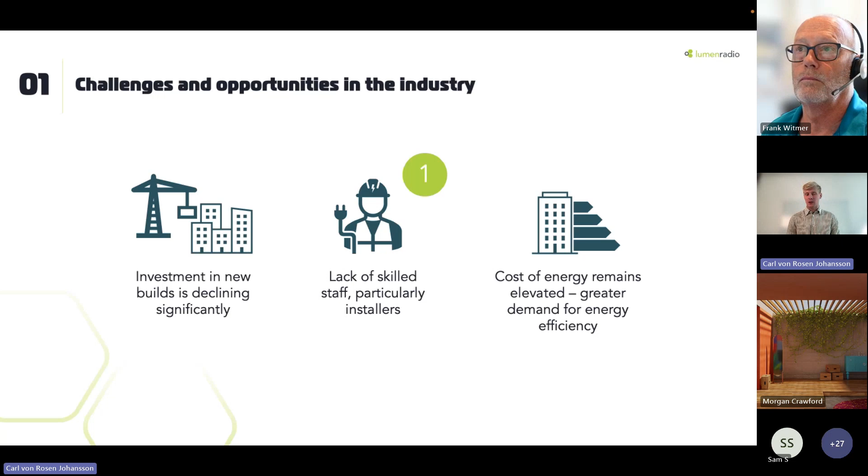And I think we have what we believe is a solution for that. It's not how you get more people, but the people you have can do more jobs more effectively. And we have some examples of that.

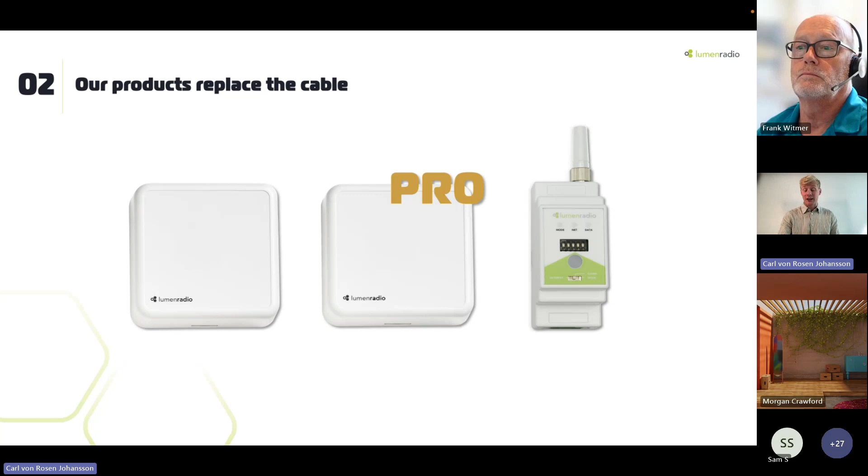But just to be clear, as Frank said, our products, Broudy carries them, Broudy has stock on them, so you can always buy them there. Super convenient. It's called wireless BACnet. It replaces the BACnet MSTP cable. It's what we call the wall mount Pro, and the DIN rail. And soon you will also have DIN rail Pro. That is the same product as the wall mount Pro, but in the DIN rail form factor. So that's coming as well. But basically, in short, Pro versus a normal one is that you can have more MSTP devices trunked to your wireless device. But we will talk more about that later.

So how can wireless help you? Me and Frank have 4 examples with us today, and I will talk first about one, and then Frank will mention one case, and then I will talk about 2 cases where I think it's the bread and butter cases, so to say, where basically the scale and the full potential of the wireless system comes into place. But to get it started, this use case, Ian knows a lot about it. He's been in the building.

Basically, it's a massive old building in New York, just on the Hudson, and it's 2.3 million square feet to cover. And the base installation, which Ian helped them do, I think it's 2 years ago now, it was 50 BACnet units to cover all 18 floors.

The purpose of that was to collect LoRa temp sensors that go into a LoRa gateway. That LoRa gateway spoke BACnet MSTP. They use those temp sensors to control the environment in the building, so it's not going to a cloud only for monitoring, it was actually used in a control loop. That's why the LoRa gateway had BACnet MSTP back to the Jace and Niagara.

But the BACnet MSTP trunk was not able to drill through the 3 feet thick concrete wall, so they needed another wireless solution to bring that back in. And that's where they started with our devices.

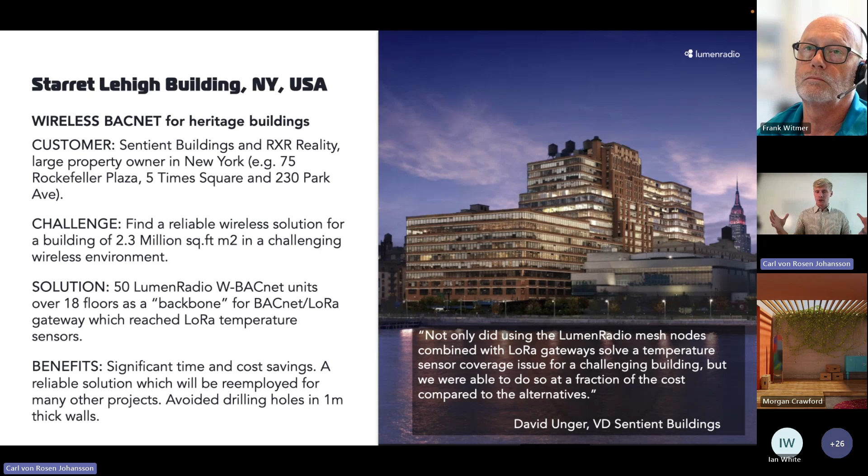Of course, it's not recommended to have that big of an MSTP trunk on one trunk if you're doing full active control loop. But in this case, the requirement was once per hour for the temp sensors. So with lower requirements, you can have bigger networks. With fast requirements, you should have a smaller network. But we can come into that.

But Frank, I want to give the floor to you because this is a case you've been working with. Yeah, this one here is up in North Jersey, and it was a job that KF Mechanical had done, where they had rooftop air handling units that they needed to bring back into their system.

And the challenge was that they had the MSTP controllers sitting up in their metal enclosures on the roof, and needed a way to be able to connect them all rather than spending a lot of money to run conduit and get it hardwired in, where they were able to go in and use the W-BACnet device. They put in a gateway in the center of the roof in the mechanical space with the Jace, and then they had the W-BACnet devices at each unit.

Initially they had them installed inside the unit, and there were some issues with the wireless signal coming and going, which makes sense, it's sitting in a metal cabinet. They remote mounted the antennas, and everything's been running great from there.

So they definitely reduced their installation costs by going this route instead of trying to run conduit and having to go down below the roof, across, and back up at each of these units. And it's been going very well for them.

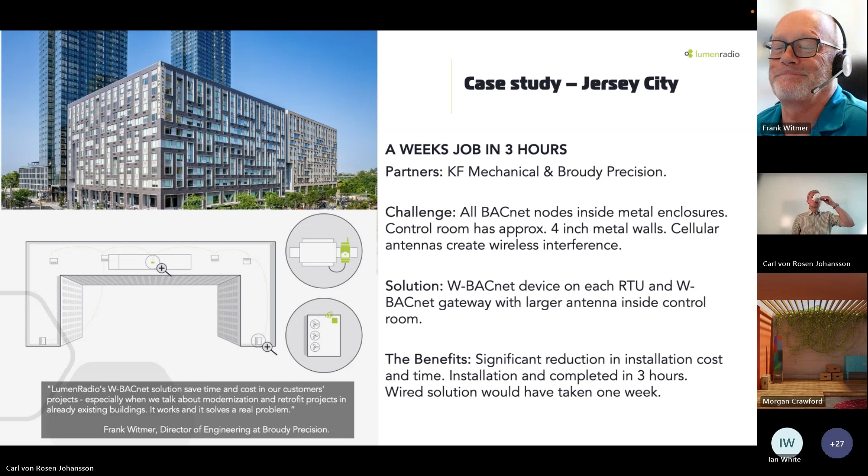And then, well, what do you say, Frank? Do you get any callbacks after the first job? Yeah, it's a leading question. It's a quite easy system where you have the first job where you always need some hand holding, and then it's that.

And here I think the next one I'm bringing up here, we have a school with Broudy that will be installed this summer, that we will do a use case of. But until then, I'm using a Swedish example because I think it's quite nice.

Because you have a stat or a room controller or whatever you call it that is a BACnet MSTP, and you have it in mostly all the classrooms and all the teacher rooms, and you're doing this ESG upgrade or energy renovation where you swap all the room controllers to be communicative, talk BACnet instead. So you can have scheduling, you can have smarter stuff to save energy and those kind of things. Hotel rooms is the same story, also stats doing this.

And this is just an example where you had 126 room controllers spread out across this 3-story building.

It's a middle school in Sweden, and it works great to have many wireless BACnet networks in the same building. This is 5 BACnet trunks, roughly 25 room controllers on every trunk, spread equally across the building.

One of the important factors was that they can do these renovations with no disruption to the school, taking one classroom or teacher room at a time. You don't have to drill through walls, there's no disturbance. When these guys are doing hotel rooms now, it's interesting because they only do the room when the cleaning is being done, so there's no other disruption than one room at a time, then they take a couple of rooms. For the installer it might be a bit messy, but overall it's a very flexible installation for the property owner and the system integrator.

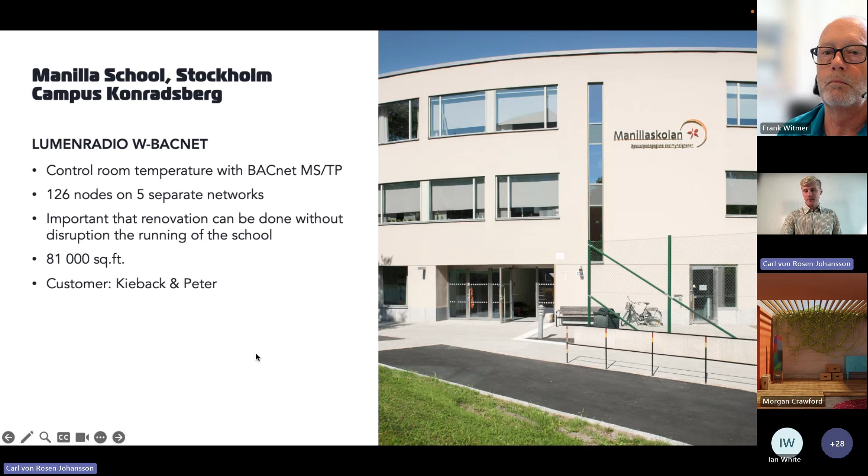I have one final example I'd like to share, and here I'd like to show how you as a system integrator and a property owner can get validation that everything works.

This is the National Museum of Poland in Warsaw. It's a very old building with very thick brick or concrete walls, just like the Starrett-Lehigh building in New York. Here they had VAVs controlling the rooms where all the paintings are, so it's a quite critical VAV that needs to get the right air with the right moisture in the room. They had already worked with our OEM partner Produal with temperature sensors, so they were used to working with wireless with the Produal Proxima system.

Therefore they said, okay, we need to control the VAVs, let's go for wireless Modbus in this installation. And they installed it for the 12 VAVs. As you can see, there's one more device, shown in red here on the map.

That's because over this 600-foot-long building, they needed a repeater at one place. You can see in the signal strength that some of them had a weaker signal, so they had to expand with an extra repeater. That's why it showed up, because there was no Modbus or BACnet communication on this specific node.

So, I was thinking, Frank, I know you said you put your gateway into Bluetooth mode. Is your mobile app ready so we can show live how it looks? Yeah, we can. I was going to also mention another use case we had.

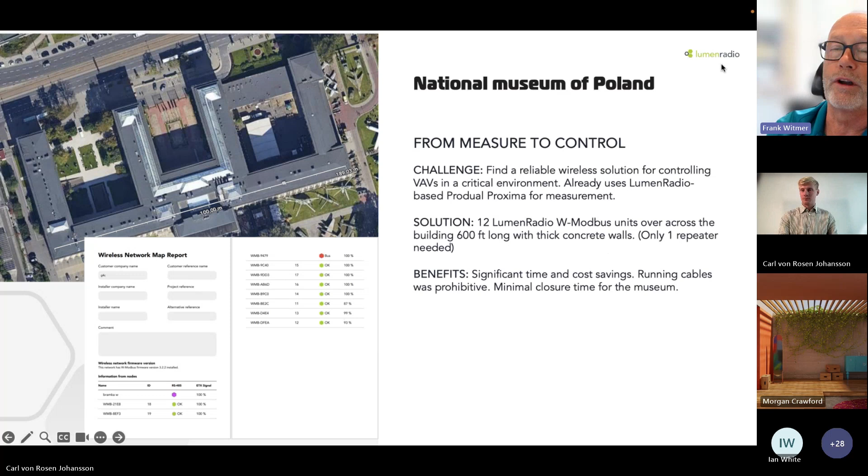I actually got to visit a site about a month ago where they had a parking lot gate at their building, and they needed a way to control it. They had a controller in that part of the building, fairly close to where it is, maybe 150, 200 feet away. They didn't want to run conduit out there to control it. So they put the W-BACnet out in the gate control panel, which was a really old, heavy gauge steel panel. I knew right away why they were having issues, but they had put that in there, and they had the gateway back in the building.

Once you open the panel door, it worked great, and once you closed the panel door, you lost the signal. So obviously the easy way around that was to put in an external antenna on the outside of the box, and everything's fine. But the one thing I got out of that visit was that it was the first time I really got to use the app on an actual site, especially one having signal issues, and that's where I got a lot of hands-on experience with it.

And what I'll do first, I guess, is share my screen. Thanks for sharing that story.

It's so nice to hear, because typically what you're saying, Frank, is the mobile app is really well used when you see issues. On a site, sometimes you'll have issues with one or two devices, and that's where I think it's very handy with the mobile app.

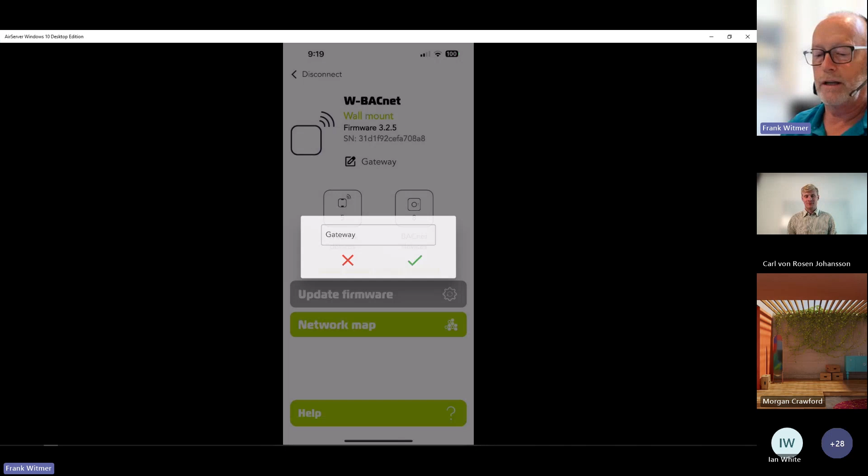So right away, what we see is I called it gateway. You can go in on any of these devices and rename it. Tap on gateway on that pencil, and you can rename it if you'd like. Below that we have the firmware. So whatever device you put in Bluetooth mode and bring up in the app, it's going to tell you what the firmware version is.

So it's a great way of seeing what version you're running. This being a gateway, you'll see we have 5 wireless devices. So this W-BACnet gateway sees 5 nodes out there, and across those 5 nodes we've got 8 devices. It's a quick summary of what it's got, showing that the latest version is already installed.

If it was not, the app is going to go out to the cloud and find out what the latest version is, compare it to the gateway, and if it's not the latest version, you can update the firmware from here. One of the real nice features is once the gateway's up at the latest version, it's going to look out at all the nodes and determine what their firmware versions are, and it will actually push the update out to those devices. So if you added another device to the network and expanded it, the gateway will look and see if it's the latest version or not and push it out to it. That's a great feature in there.

And then the other is if I tap down on network map, it gives us a map of what the mesh is, how it's set up, where the hops are going through. In this case here, the magenta, that's the gateway, the W-BACnet gateway. Then I named each of the nodes with different names.

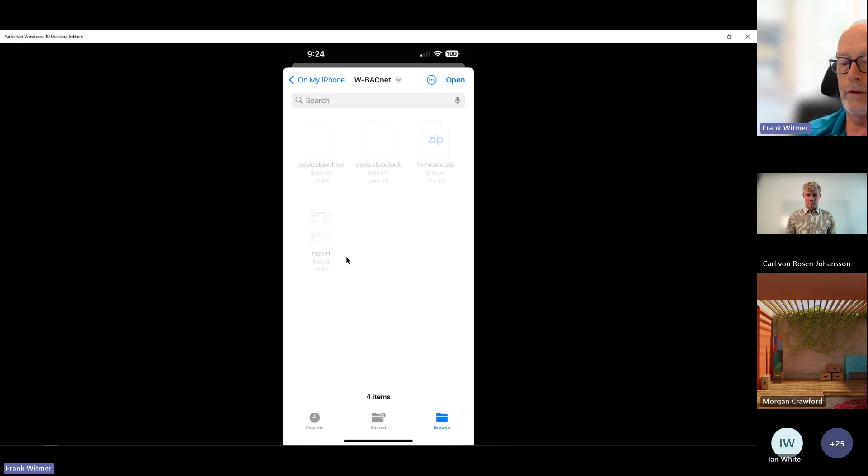Trying to think if I have - okay, there we go, open. It'll let me - oh, generate, share. Maybe that's where it was that I was able to. So that is a bit inconsistent on the iPhone - it says open, but it actually saves at the location where you did. So if you then go into files and into that location, you will see the PDF report.

Oh, now you're going to make me go to files on my phone. No, because I think, like you guys already saw on the call earlier.

If you're re-watching this recording, you can just go back to the National Museum of Poland, and then you see the PDF at the bottom of the screen. I did see that there. But basically what it's given you is a PDF of what you see here with the network node expanded out, with all the data on it.

And then also you have the information at the top that tells you the 0 to 100% is the ETX - yeah, it's our LumenRadio version of packet delivery rate. So we're planning on saying it better in the next version of the app, because ETX doesn't mean anything to anyone outside LumenRadio. But to simplify, it's from 0 to 100% packet delivery rate, and you should have somewhere above 90%.

And it actually color codes for you, so if you look at the color, it probably tells you more than the percentage. But of course, 100% is good.

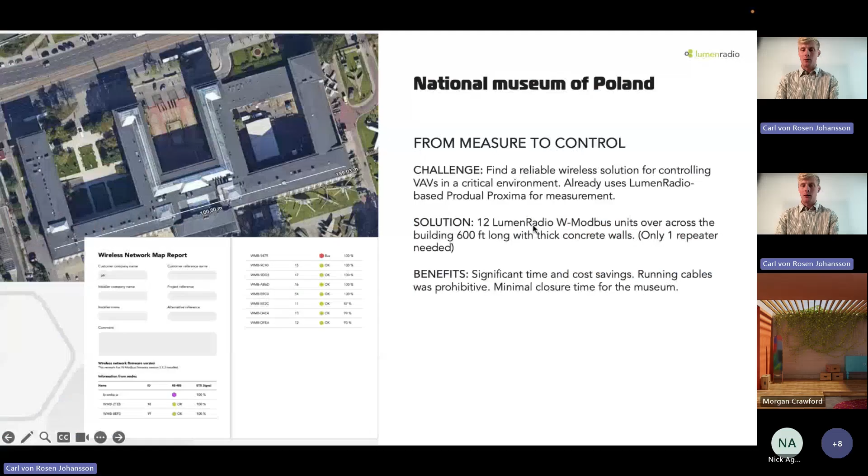I don't even have to show the mesh slide, because I see we only have 4 more minutes and I don't want to take too much time. But seeing is believing, so that's why we like showing you the app and how it works. In short, I'll go through some fast slides now on cost calculation, and if we have time, also say why it works the way it works. But I like to show this slide to give you some flavor of how people save time.

One of those things is the planner that does the job. Hassle-free quoting is one of these things we've heard from customers, where basically they don't have to know if there's a BACnet MSTP trunk or not in the building, because you just put them out where it makes sense and you have no variation in the cabling time - one room takes 1 hour, that's it, boom, next.

And then for the installer, that means you save a lot of time on the boring stuff, drilling and pulling wires. Of course, some installers will say, well, then I have less job. Well, you can take more jobs, and retrofits are in high demand, so it doesn't matter. Remember, everyone says it's hard to have skilled installers - now they can do more jobs, it's that simple for them.

And as you saw with Frank, the system integrator, you get faster troubleshooting. You can hand over a project easier to a real estate and building owner, a property owner. And of course, the property owner saves money in the project overall, but it's also about lowering the threshold of doing a project - with a BACnet router that goes from MSTP to IP next to our gateway, suddenly you could cloud connect it to a cloud system.

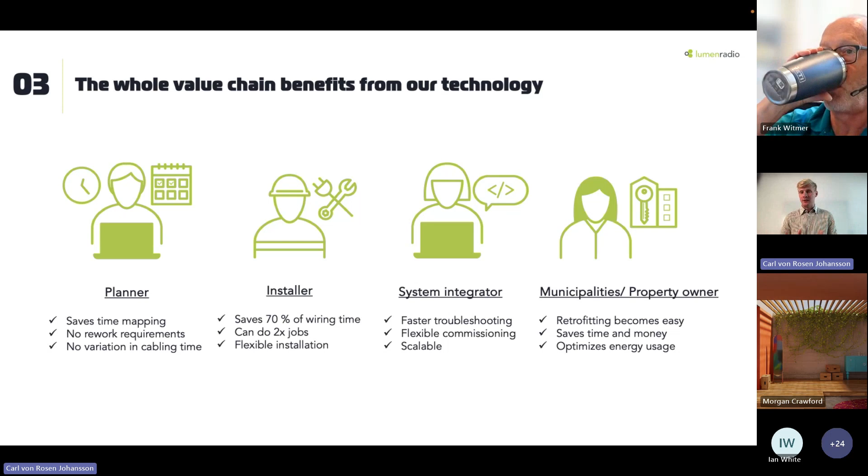You don't have to have a Jace in every retail store. You can collect many retail stores into one net, for example, one Jace in the campus area. That could be one way of getting that single rooftop unit that has been offline for the past 20 years, and this is just an example of how you save so much time on the installer.

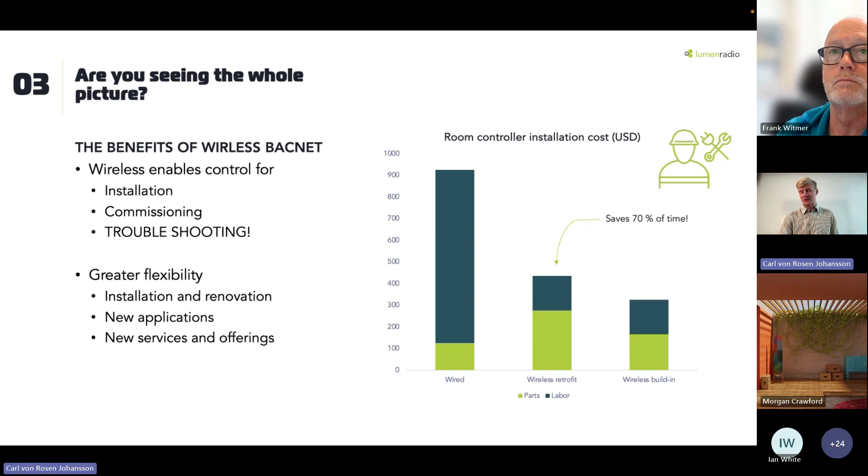This is a rough estimation of what it would cost and how much you would save. For some people it's quite obvious that installer time is the most visible time saver, but remember, the planner spends less time, the system integrator spends less time. Everybody spends less time on projects with this.

I know we have 2 more minutes, so I won't have time for questions, but why does it work, what's our secret? Frank and Ian and the Broudy team would love to tell you more about this. But in short, we're big in entertainment lighting. We have world monopoly basically on wireless DMX for controlling these big lights, and it took off at Coachella 2012. We've been in lightsabers, that's our most claim to fame. We're in the Super Bowl, Eurovision Song Contest, all the big live shows. So we're really a big brand there.

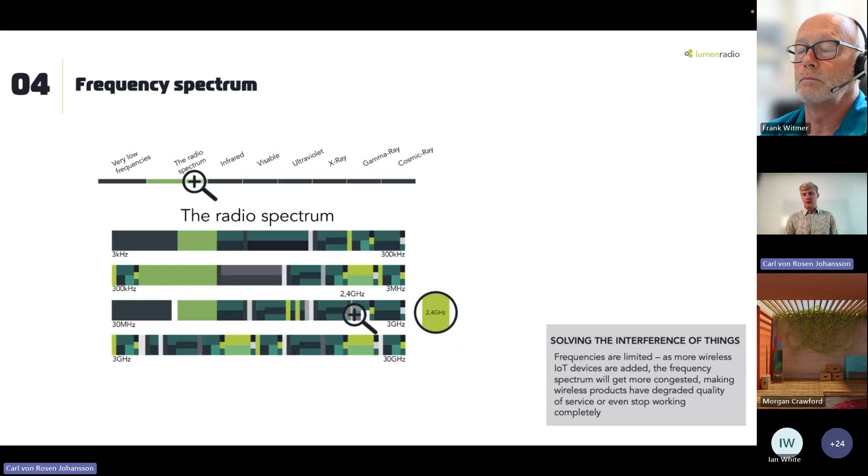We work on 2.4 gigahertz because our founder made a really nice patent called cognitive coexistence. Here you immediately see the difference between Zigbee and our technology. Zigbee is this small dark red area where, when you do the installation, it's fine, and then you start the building and you have to come back and change the Zigbee channels. That's what our patent does.

It's hopping in real time. You saw it with Frank, the mesh is changing in real time, finding the right path and also finding which frequencies are available. That's where we are, and that's our patent we've had since 2008. So it's a strong patent that makes our technology work when no one else's does.

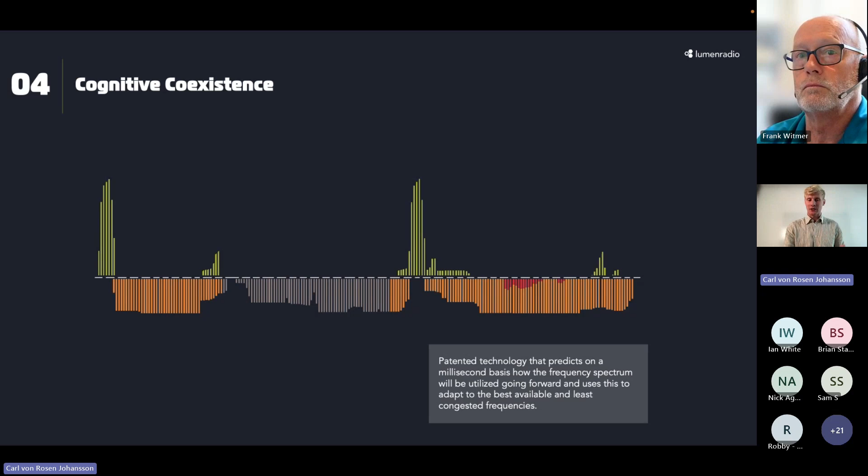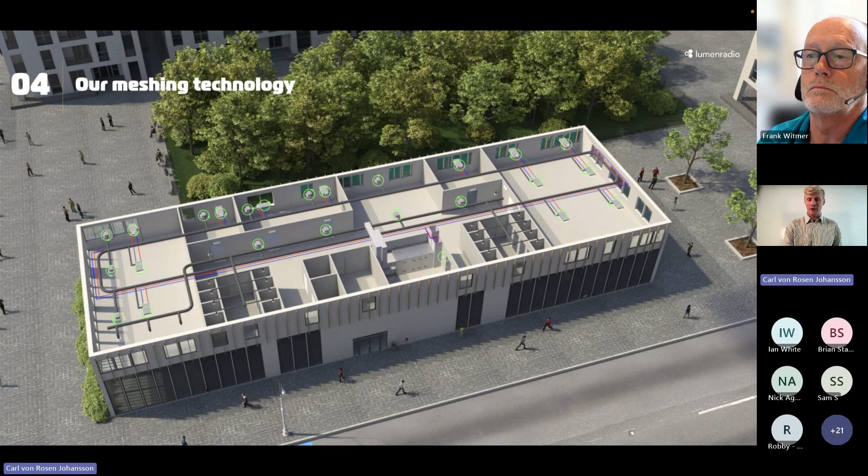It also gives us the opportunity to have much higher output power. As I mentioned, and as you saw real time in Frank's app, it's meshing, so it's self-healing, finding the best path at all times. We're in Honeywell Connected Power, for example, a product that I saw Matt just published on YouTube, I think yesterday, explaining it. So Honeywell trusts us, and a lot of other European brands as well as Prolon. We're out there, our technology has been there for quite some time.